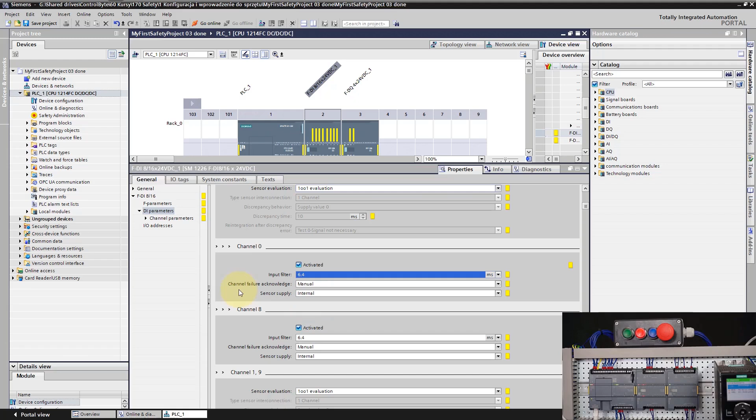At this point I can activate or deactivate specific channels 0 or 8. I can also set the input filter in milliseconds from 0.8 to 2. You also need to select the error acknowledgement option after passivation, either manual or automatic. If you select manual, you will need to call the appropriate ACK_GL function from the user program or set a dedicated error acknowledgement bit for this channel in this module. We will get to that later.

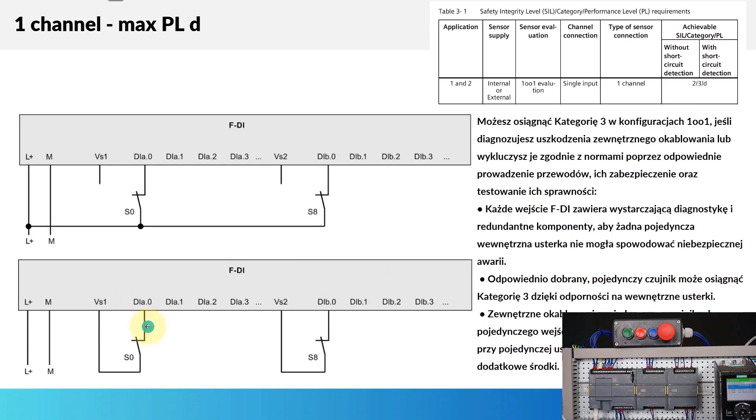The next parameter is sensor supply, internal or external. As a reminder, external means powering this signal from the L+ potential, +24 V, which also powers the entire module. Internal means selecting power from the VS1 terminal, or VS2 for section B. We will select the internal option for both channel 0 and channel 8. Importantly, notice that at this point we still have the short circuit test checkbox unchecked. For now, we will select internal with the short circuit test checkbox unchecked.

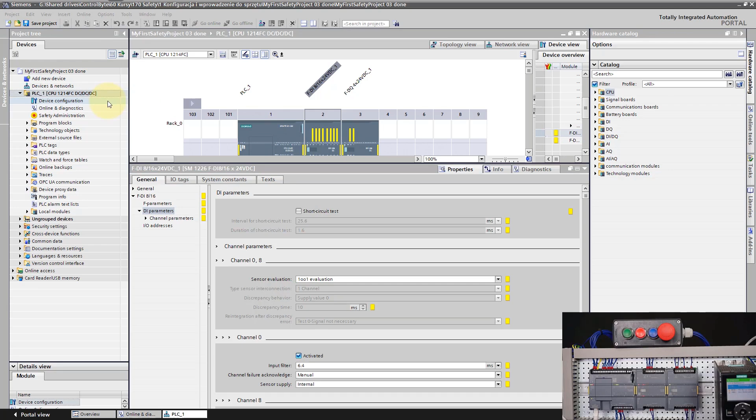We will now perform a verification test to see if our circuit works when we create a short circuit to +24 V or a cross-channel short circuit. Let's also check the assigned variables. I have one variable assigned to channel 0 at address I8.0. It will work the same way with single-channel evaluation. I will now download the program to the PLC. I'm stopping the controller, downloading the program. I have now started the PLC.

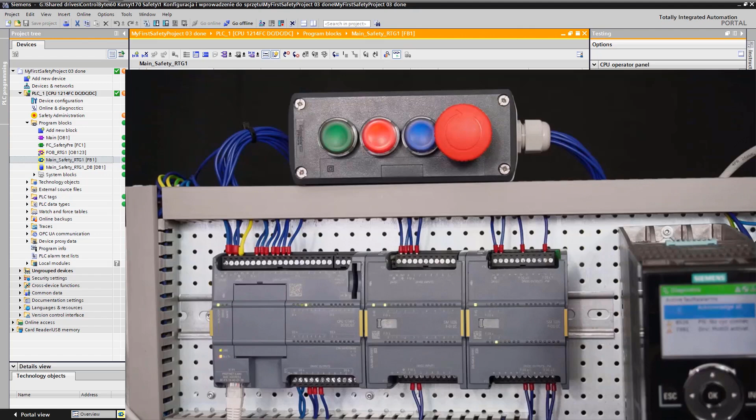Let's see, everything is green, great. Okay, let's run a quick test of our program. Right now, the e-stop is in the high state on the controller on the safety input module. On channel 0, we have a green LED, meaning high state. I press the e-stop. Now the variable goes to false and the contactors turn off.

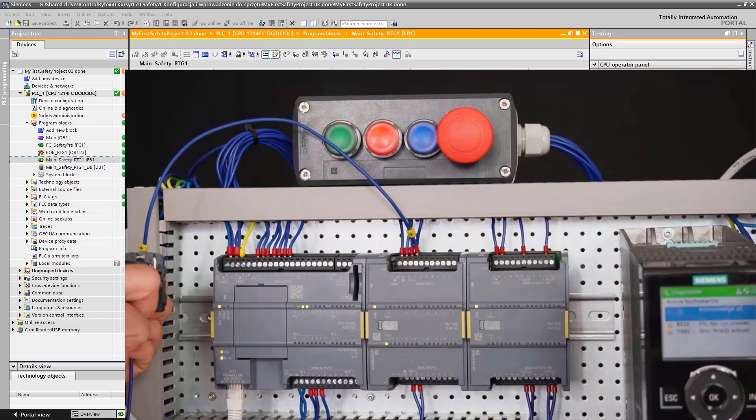Great. Let's perform a simple functional test for short circuit detection on channel 0. This channel is connected to the VS1 supply. I have now connected a jumper wire. Using this switch, I can apply +24 V from the module. If I turn the mushroom head, the contactors are energized without any problem. If I now flip this switch, which will create a short circuit to L+ on channel 0, the program continues to execute without any error.

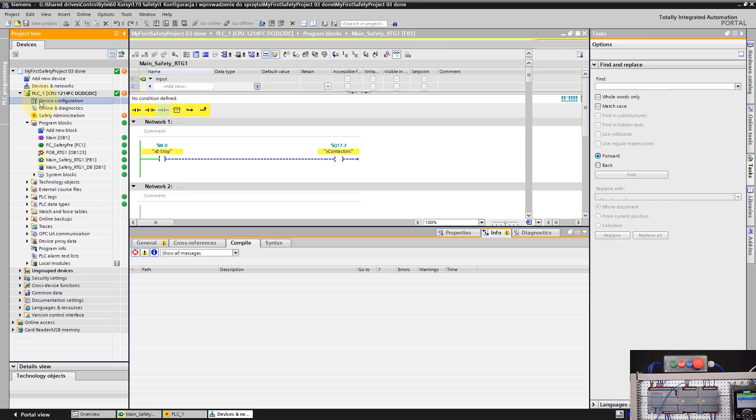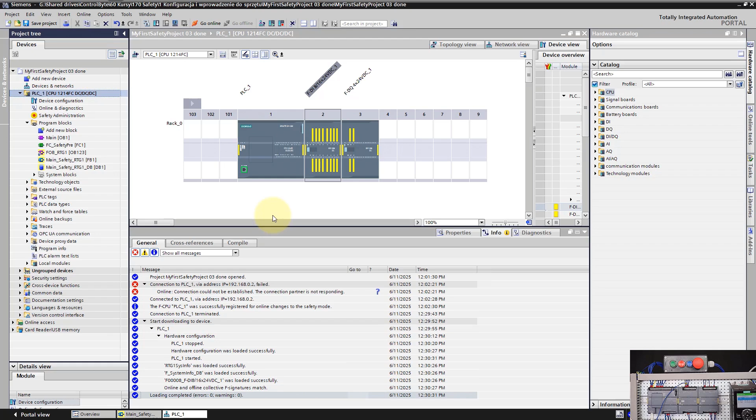Now let's change the setting in TIA Portal device configuration, in the module settings, DI parameters. Let's check the short circuit test checkbox. Let's leave the default settings for now. Let's now run the same test. If I pull the mushroom head, the contactors are energized, everything is green, no errors are reported.

If I now create a short circuit to +24 V on channel 0, it lights up red. You can see the red LED next to channel 0, and automatically the output was not energized; the channels have been passivated. If I try the e-stop now, it does not respond. The circuit remains passive. Okay, I have now removed the short circuit.

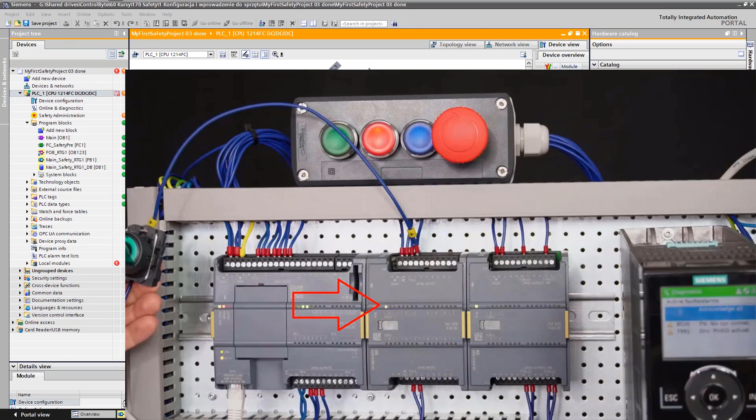Notice that the system changed the way channel 0 is indicated. Right now, the green and red LEDs are blinking alternately. This signals that a reset of this channel is possible. How do we reset this channel? We need to call the appropriate function because we set manual reset after passivation for this channel.

Okay, let's run one more test. Right now I press the mushroom head, the contactors disconnect. I turn it to reset the signal. Currently the state on channel 0 is high, and I will try to create a short circuit to L+.

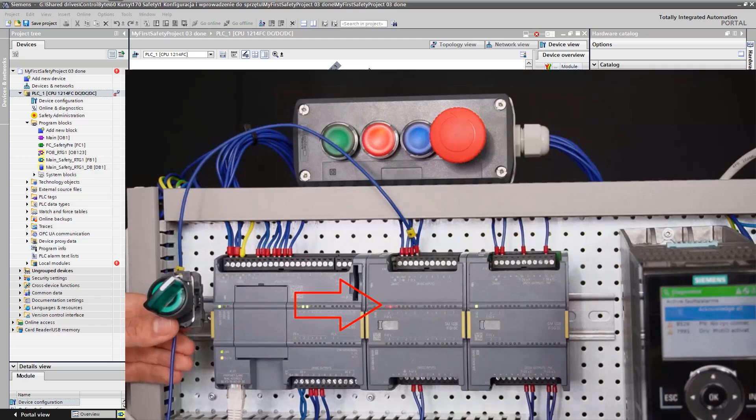Notice that right now with channel 0 in the high state, I created a short circuit to L+. Our safety controller also detected this short circuit and reported a fault condition. I hope you can now see the difference between the first schematic using the L+ potential and the second one using the VS1 or VS2 potential with test pulses.

Let's now analyze the information about the category and performance level, which you can find in the Siemens documentation. Siemens states that by connecting a sensor in single channel mode to an input, for example to channel 0, you can achieve a maximum of category 3 up to performance level D.

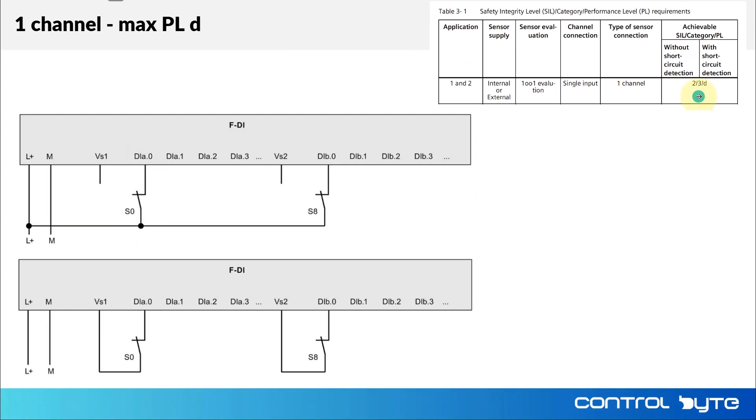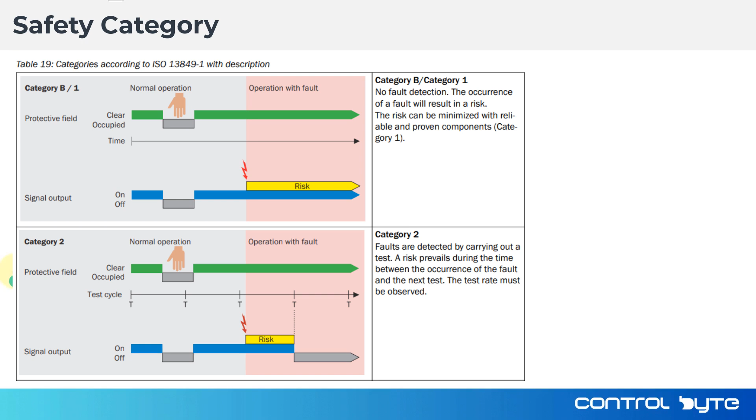There is a certain pitfall in this information, and you need to carefully analyze the definition of the single channel connection category for category 3. You can see here the definition of category 1 and category 2. In these categories, we use single channel connections. A fault can cause the machine to operate with a defect and expose the operator to risk.

Category 3 requires a redundant system. When a fault occurs, the defect must be detected after some time to prevent the machine from operating with a defect and exposing the operator. Risk can only occur in case of an accumulation of faults in the system. Category 4 is an extension of Category 3, where even an accumulation of faults cannot lead to a loss of the safety function.

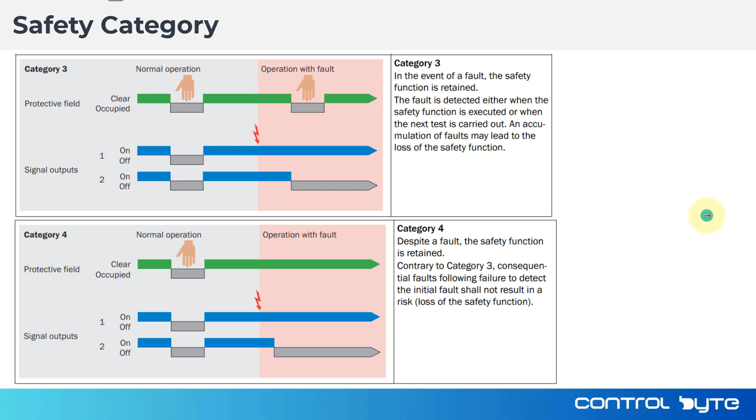Now you might ask, how can we connect a device in a dual channel manner to a single channel in the Siemens Safety module under category 3? Look, on the schematic the sensor is drawn as a single NC contact. However, we can connect here a single circuit from a safety relay or another device. If you use terminals 13 and 14, then two contacts are connected in series, opening this circuit in a dual channel manner. Such a device can be connected to just one channel.

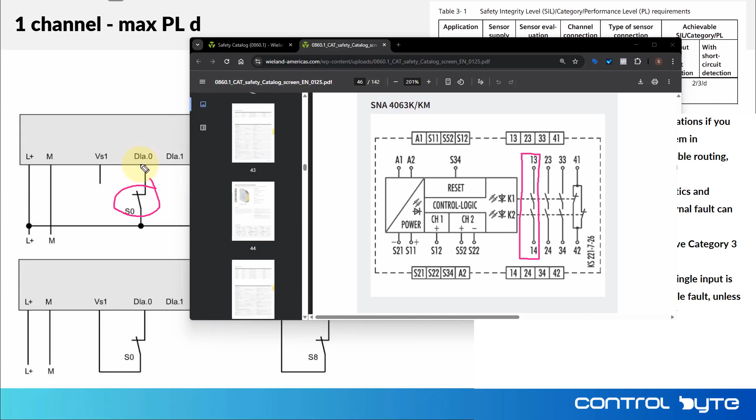Achieving category 3 for a single channel connection is possible, but it is subject to the following rules. You can achieve category 3 in 1 out of 1 configurations if you diagnose external wiring faults or exclude them according to the standards by proper cable routing, protection and testing of their integrity. Each F-DI input contains sufficient diagnostics and redundant components so that no single internal fault can cause a dangerous failure.

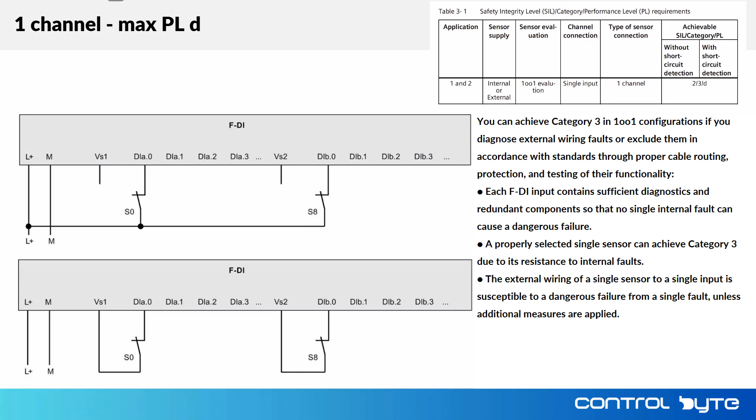A properly selected single sensor can achieve category 3 thanks to its resistance to internal faults. The external wiring of a single sensor to a single input is vulnerable to a dangerous failure from a single fault unless additional measures are applied.

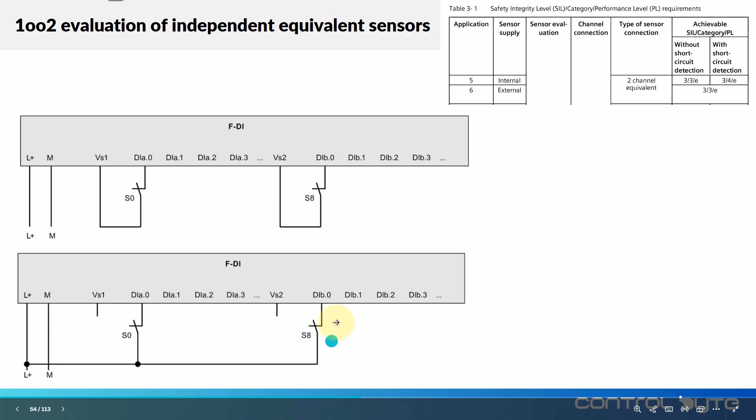The standard circuit for category 3 is as follows. We have two contacts from one sensor connected to section A and section B in a 1 out of 2 configuration. A failure of one wire from one channel does not create a dangerous situation to the second section. The second channel is connected to the second section. If you want to implement category 3 on a single circuit, you need to do additional work to protect this circuit against ground faults, short circuits to L+, and short circuits.

Okay, a quick summary of this lesson. In this lesson, I showed you how to make the connections and configurations for a single channel sensor connection to the safety module from the S7-1200 system. We analyzed various configurations using the L+ potential and the VS1, VS2 lines equipped with test pulses. We tested the activation of the short circuit detection function. I showed you how it works in practice.

Finally, we analyzed the category you can achieve by connecting a device in single channel mode to the inputs of this module. Pay attention to the maximum category and performance level you can achieve with a single channel connection. By default, single channel devices achieve category 1 or 2 performance level. In some cases you can achieve category 3, but with restrictions on cable routing.